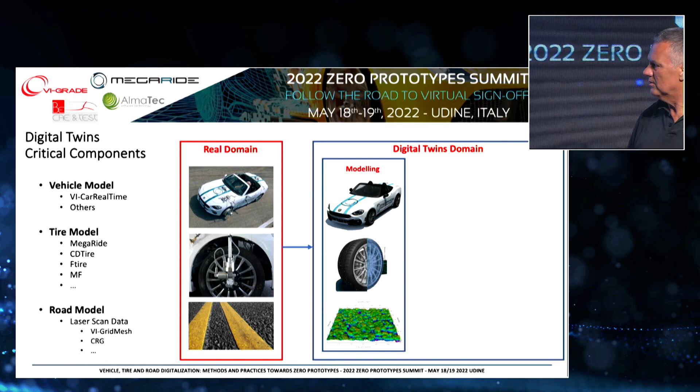And we started this joint work more than one year ago, putting together all the elements that make us confident that the digital twin, not so much of a specific vehicle but as a process, could hold, to continue the discussion and rely more and more on this duplication. So we are okay with the vehicle model, with the tire model.

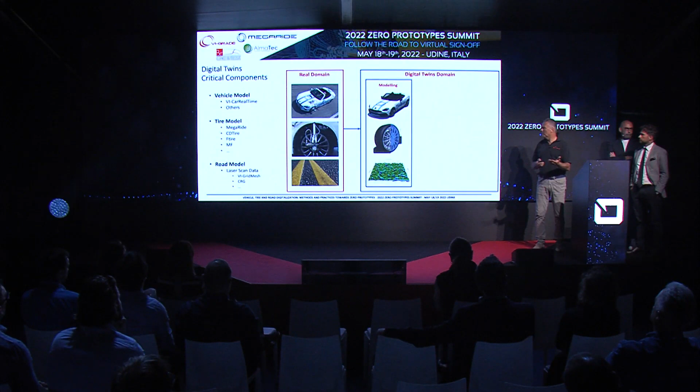The road model has always been something that for us was basically just inherited from geometrical measurement. But in reality, what we need to be sure of is that the road model, the tire model and the vehicle model are compatible with each other. So which type of work has to be done, for example, combining the road, the tire model and the vehicle model to have a reliable result.

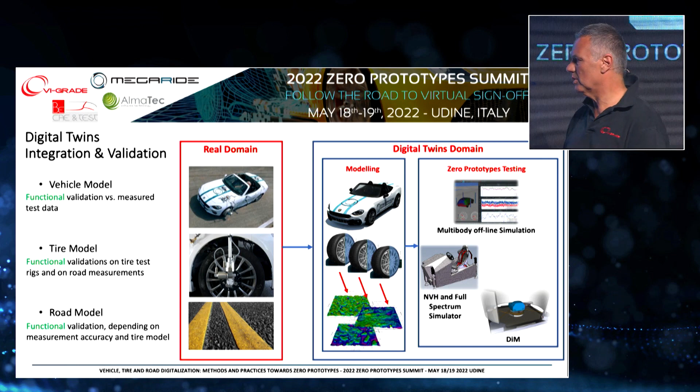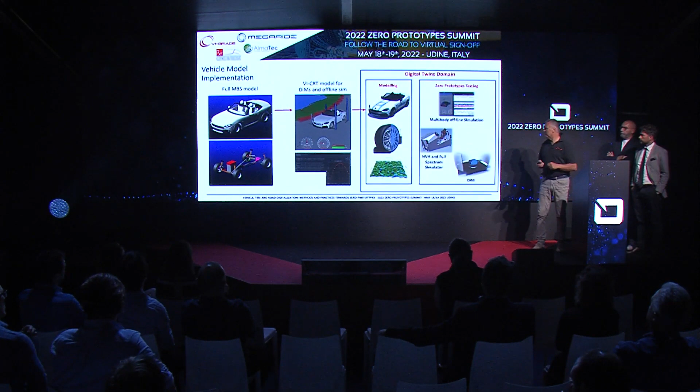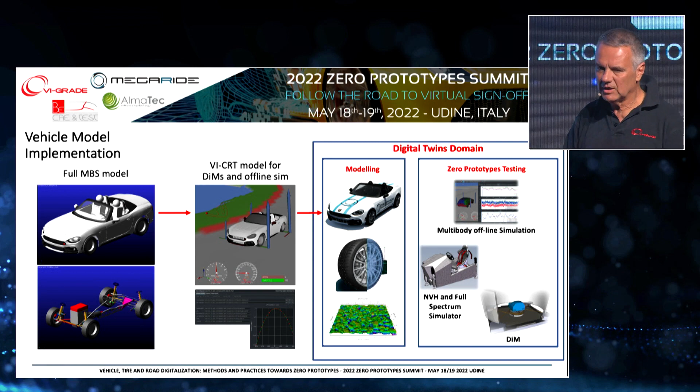You will see later. We want to have the full experience on the driving simulator. So we develop a really detailed model of the vehicle. Maybe we go to a simplified model or use the detailed model depending on the application. We use functional modeling, not only independent component-specific modeling; the integration of the modeling is certainly a very important part to consider.

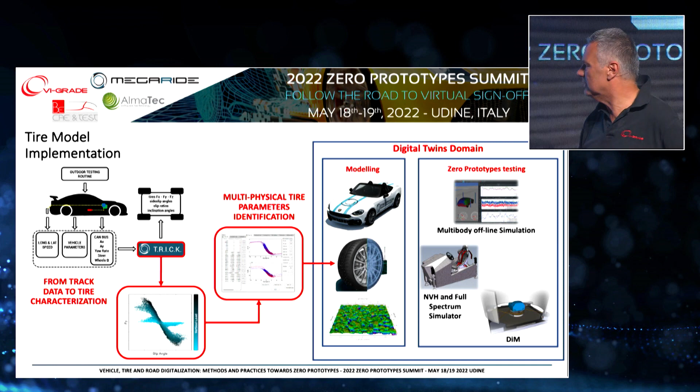And you will learn later what detailed activities need to be done to have this respond to requirements. And obviously, for the functional road model, there is some activity that has to be done, also measuring and knowing what is required to be captured to provide in the simulator the important feedback for the driver.

Then we can probably digitize everything, but the only thing we cannot completely digitize is the human driver. So after we do a really good job, how do we make sure that all this can be perceived by the real driver in the right way? Still, we have a real human on board the simulator.

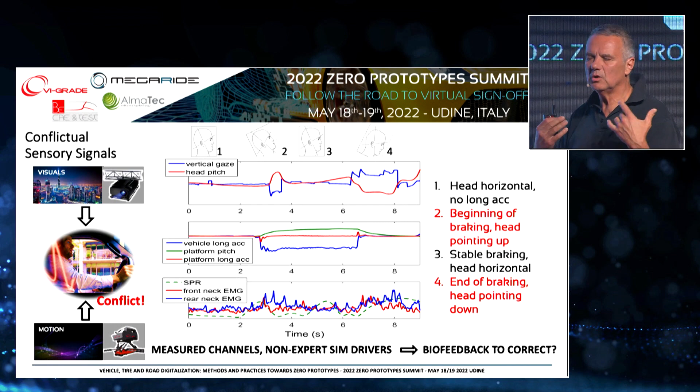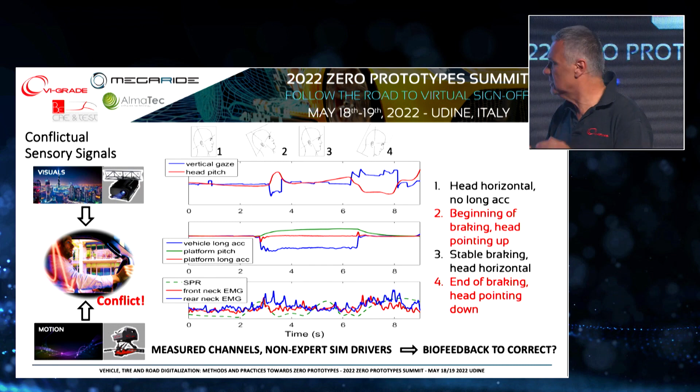At the same time as all the digitalization we do, all the continuous progress in the accuracy of the model, we also study the driver reaction. And in this simple case, we illustrate how, for example, there is a sensory conflict in a simulator when, during a braking action, the human expects to receive a certain acceleration, so he pulls the muscles of the neck back, resulting in the head, without any consciousness, being tilted upward, while the gaze goes down to keep the horizon fixed.

And this is probably creating too much of a rotation, unstable rotation of the head. This, of course, one has to realize, could be, especially in a beginner driver in the simulator, his limit.

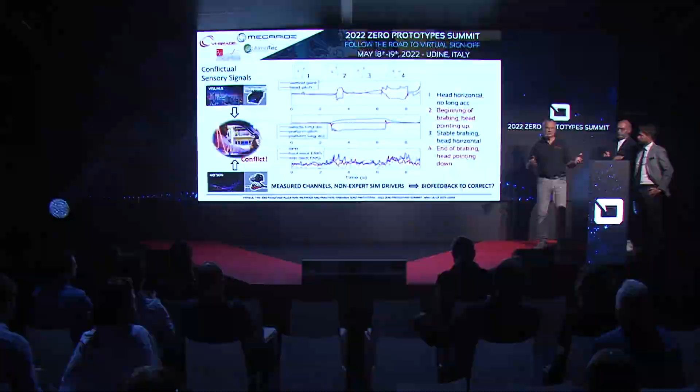And one idea that we want to apply and see if it could work is to apply biofeedback on the simulator, like skiers are taught by a coach when they see themselves again, for example, during an action. So it is possible to correct a little bit beyond what normally could be thought.

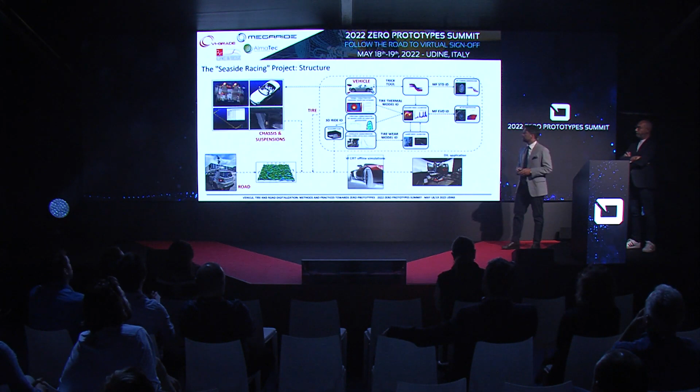So a potentially unknown track, potentially unknown vehicle, potentially unknown tires, trying to digitalize all of them with the process. So the main idea is starting from multi-physics of the tire, with a certain tire that we have on the ground of which we don't know anything at the beginning. Then the part regarding the activity we usually do on vehicles regarding the parameterization inside, for example, CarRealTime.

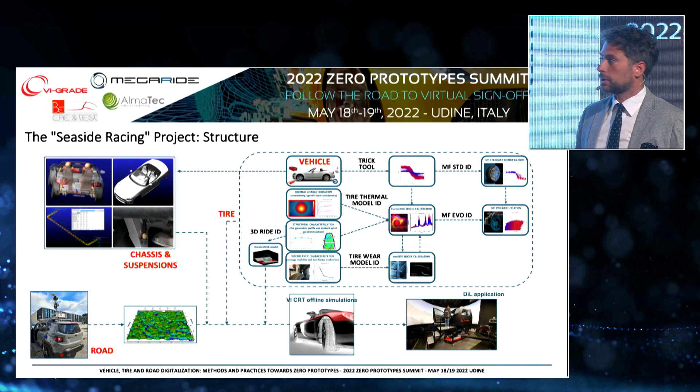Then there's the road, with the devices which allowed us to know something more about that road, virtualizing it and bringing it inside, first of all, the offline simulation channel, and after that the driver-in-the-loop application. So the targets of the project were optimizing the road texture geometrical resolution related to tire modeling and contact multiphysics.

Then we wanted to deepen knowledge on tire ride and wear effects on the driving perception. We want to correlate among road geometrical, frictional, and acoustic features of the road patches, and implement all of that inside the driving simulator for a multisensorial experience.

So the first step of our activity concerned the road and the external environment. With the proper instrumented vehicle, we had laser scan integrated photogrammetry, with 3 cameras and 2 lasers with a millimeter resolution. We scanned all the road of this track, which is Circuito del Sele.

And the main idea was to clean and filter the road point cloud in order to generate a grid mesh from zero. And after that, creating a correlation between the measured roughness and the algorithm of the parameters. That was the first step.

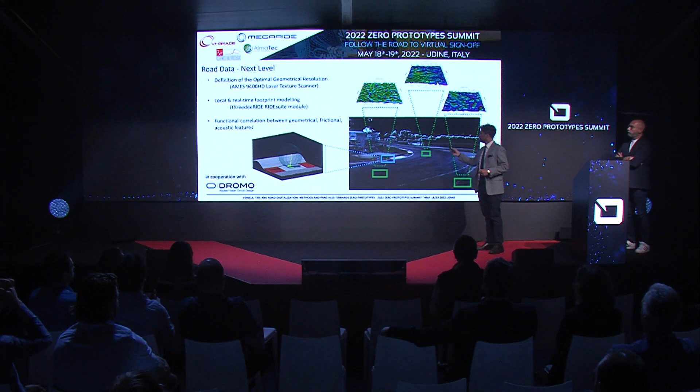The second step is assigning to each single point of the grid mesh some specific functional correlation. It means geometrical, frictional, and acoustic features to each different patch of the road, which has been scanned also with a very high definition rugosimeter, which is the AMES 9400 HD.

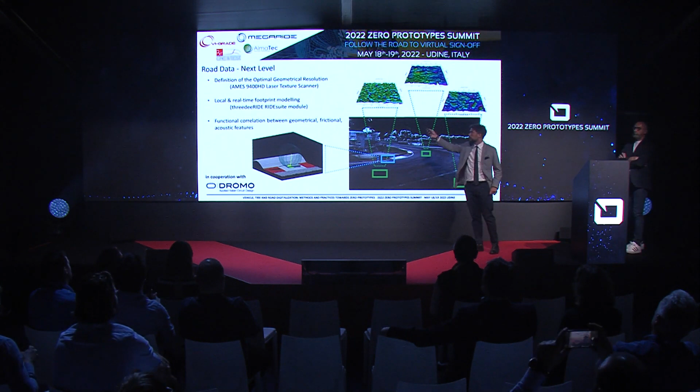Next step, we moved to tires. We selected the tire, it was a Toyo tire, and we moved with several different methodologies to get the tire data from several different procedures. The first one was with our TRICK tool, which takes the data from the vehicle and allows us to characterize the tires. We also worked with Calspan and with their bench, and we also mounted a wheel hub by Kistler on the wheel. So we had 3 different ways to understand how the tires behaved.

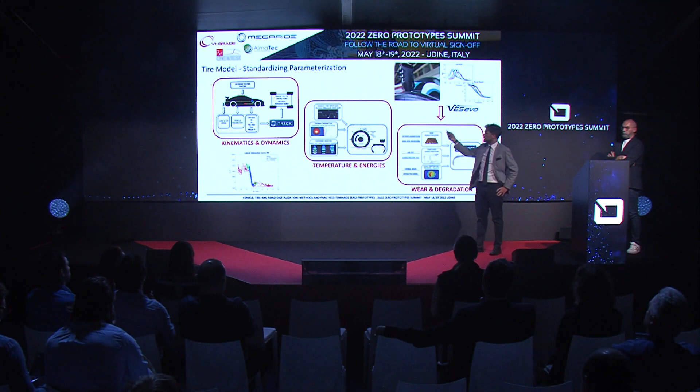After the kinematics and dynamics, we worked on temperature and energy, so we characterized the thermal conductivity, the specific heat, and the footprints with a completely non-destructive methodology of the tires we chose, and we put them inside our thermal model.

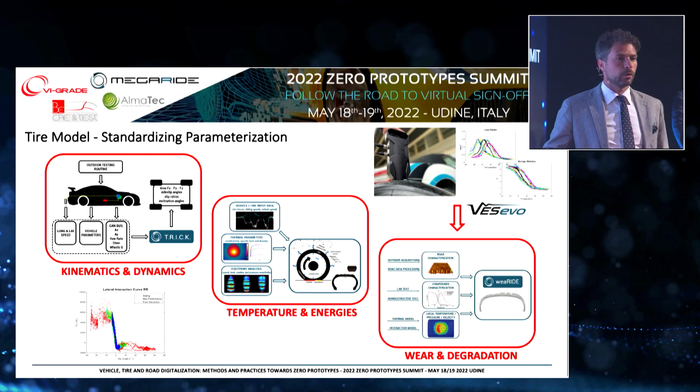And after that, once we have the energies and the temperature, we have also the roughness of the road, and we have the viscoelasticity of the tires by means of an innovative device called VESEVO that is in our booth in the next room. We had all the ingredients of the recipe that allows us to talk about wear and degradation. Wear is a very complex phenomenon which speaks many languages, coming from so many different phenomena.

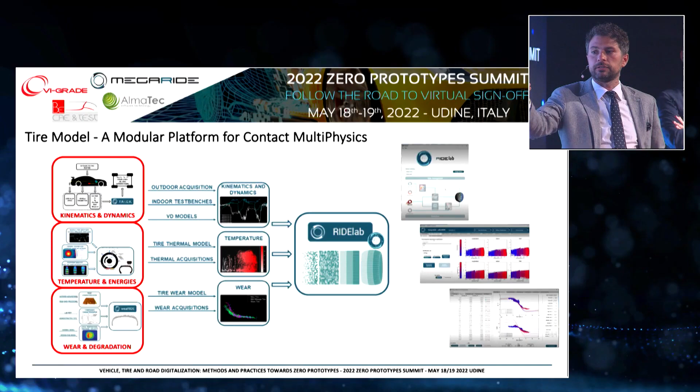So after that, we parameterized all our models, feeding a specific identification platform, which is called RIDElab, which takes into account all the multiphysical phenomena, so the kinematics and dynamics, the temperature and the energies, and the wear and degradation, putting the right parameters inside the physical models which constitute the RIDE suite tire model.

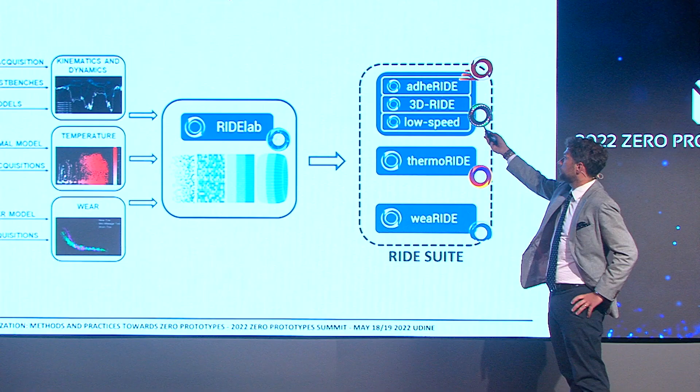We have an advanced Pacejka model which feels temperature, road roughness, and viscoelasticity. We have a 3D-RIDE multi-contact model that Gabriele will show us after. We have a low-speed module because, as you know, sometimes MF has some issues with low speeds. We have a thermal module and the wear and degradation module.

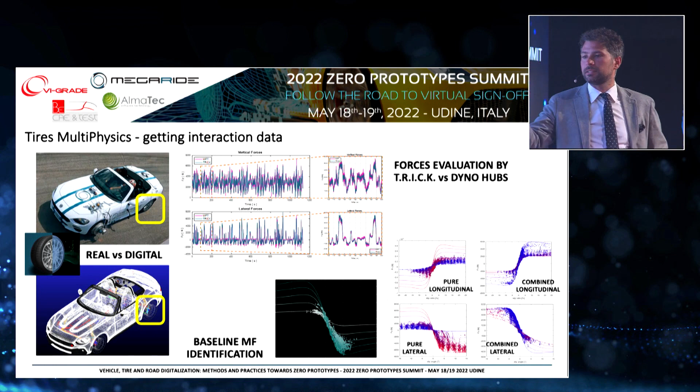What we did in terms of operative activity, we understood how we were estimating the forces with our methodologies. So here we can see that with the TRICK methodology, so from the vehicle data to the road, we are able to estimate the forces with very high accordance with the instrumented wheel hub that we had. After that, of course, we identified our baseline Magic Formula.

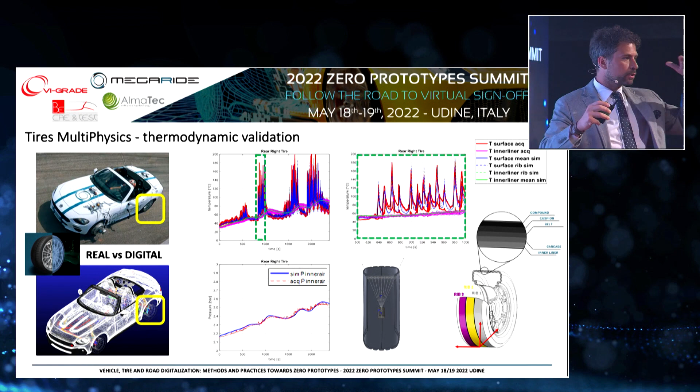Second step was identifying the thermal model. So we calibrated and we validated the thermal model, taking into account the measurements that came from the external tread and the inner liner sensors. And once we have properly identified and calibrated the model, we have all the information about the temperature layers which are inside the tread block.

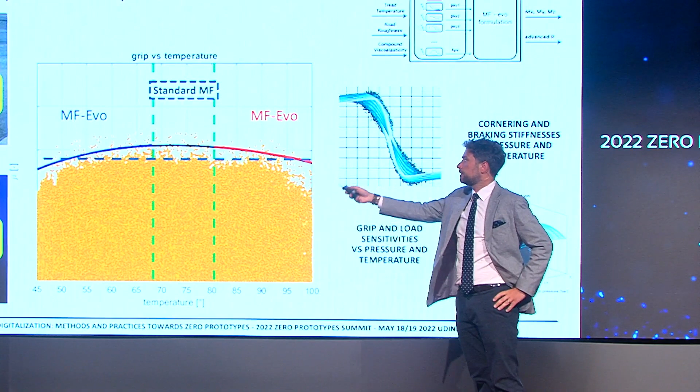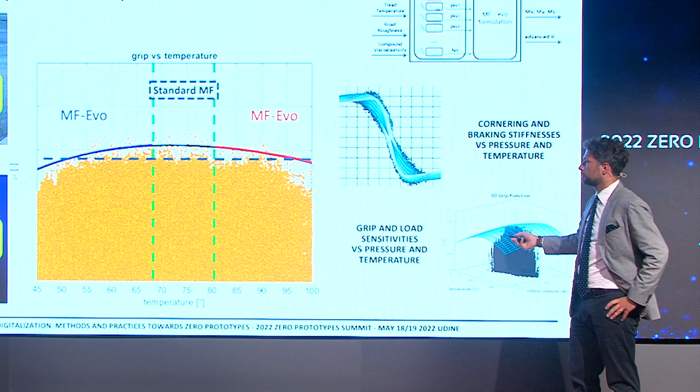Having this kind of information, it's possible to understand how the friction level is changing with respect to the temperature, to identify this kind of trend, putting them inside the advanced Pacejka formulation, taking also into account the variation in terms of cornering stiffness, braking stiffness, and of course, inflation pressure sensitivity. All these things go inside our advanced formulation, which is called MF-Evo, which allows us to put all these things inside the simulations. We also validated these things thanks to some Kistler data.

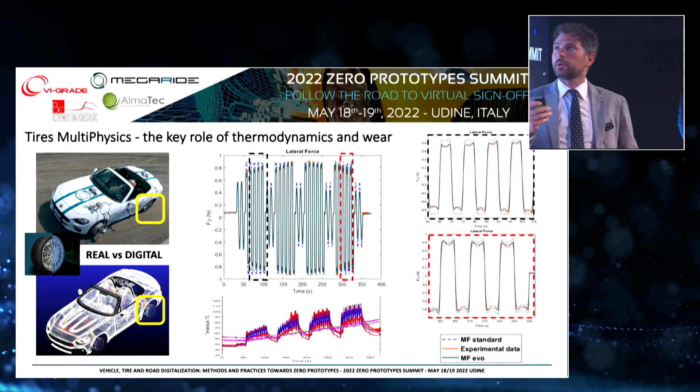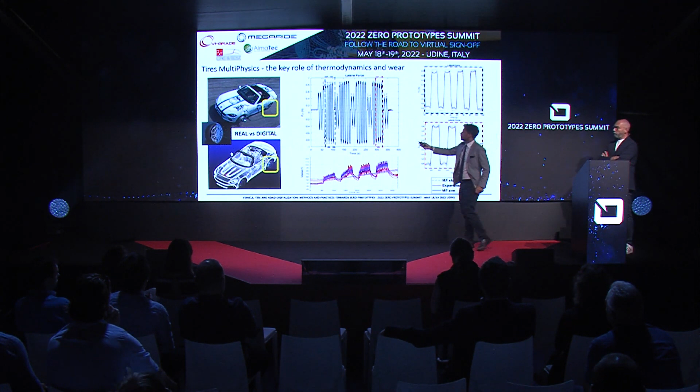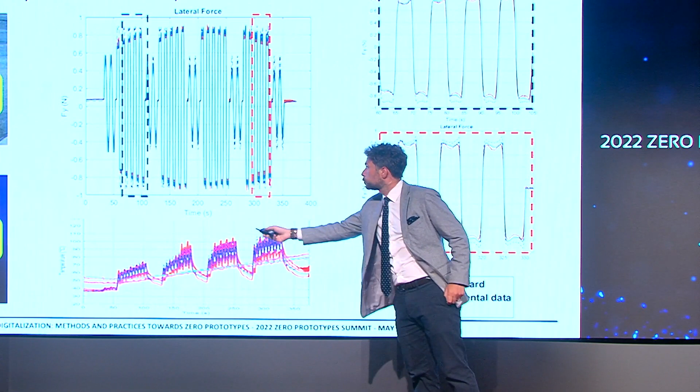And what we can observe inside a typical test is that if we identify a Pacejka at the optimal friction level of the tire, we will be able to fit only the results of the Pacejka when it reaches its maximum. But when the thermal level at which the tire is working is too high or too low, inside the red and black squares, we see that the normal Pacejka is no longer able to fit the friction level and the force level, which can be fitted only taking into account the thermal effects inside the Pacejka model.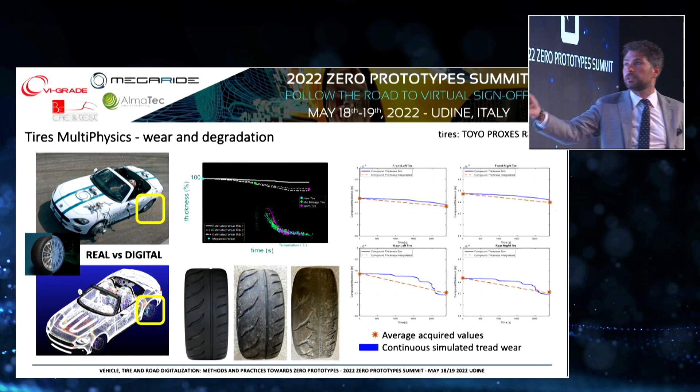Finally, once we had all these things, we put them inside our physical wear model. So we were able also to validate the wear on track because we had the acquisition at the beginning and at the end of each run. And so in this way, we have the acquisition in terms of energies, temperature, road roughness, and viscoelasticity variations of the compound of the tire, and we're able to know time by time the evolution of the tread thickness level of each tire taking part in this activity.

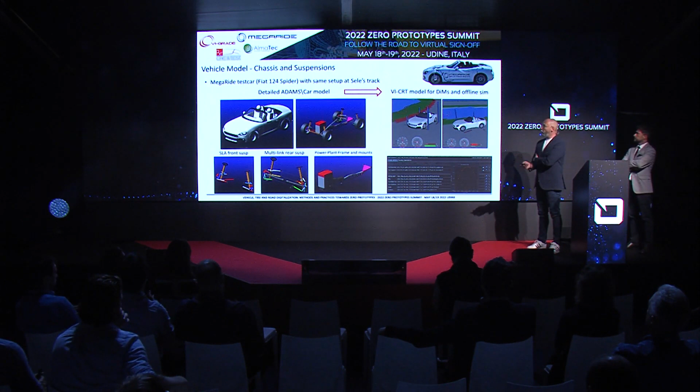Of course, the last step, but not last in the order of things that have been done, is the creation of an appropriate vehicle model. This is a standard procedure, starting from a detailed multi-body model with many degrees of freedom, even including the powertrain mount system, into a car real-time model that can work in our driving simulator.

Of course, there are initial steps, that is an offline validation using the offline tools. And we had the possibility to make a correlation and validation based not only on standard signals like yaw rate and lateral acceleration, but also on forces, lateral, vertical, longitudinal forces obtained from the dyno hubs that were installed.

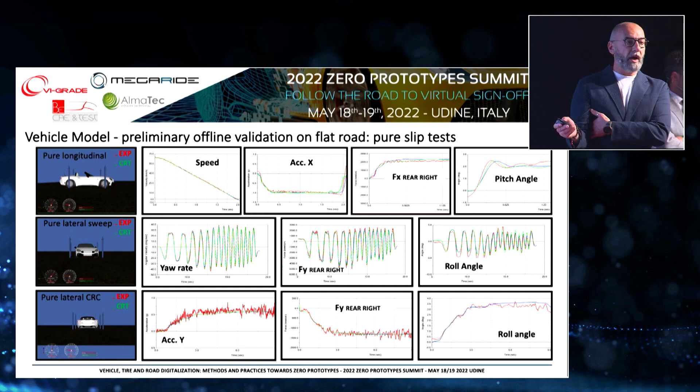Then we moved offline to a max performance simulation environment, trying to catch the differences coming from different levels of road discretization and road roughness. And of course, having also the possibility to compare the calculated loads and the measured loads along the whole track.

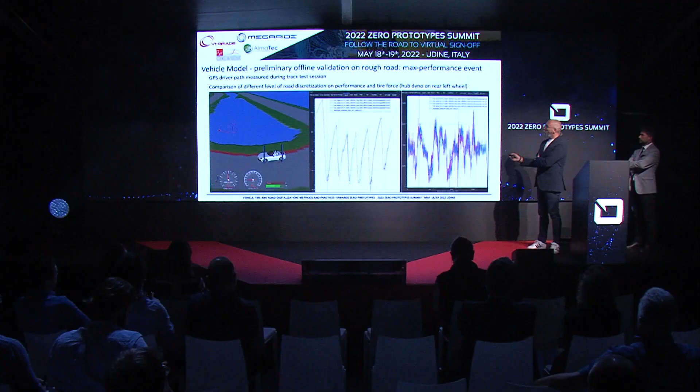After this phase of correlation and validation offline, we needed to understand the feeling of the driver, Claudio Anicello, the driver who is currently running in the demo section at DIM 400, and to receive his impressions comparing the real driving with the driving at the simulator, but not only in a single scenario, but with different simulators, 150, 400, and even the compact, moving from standard operation, which are considered like a sort of chassis tuning

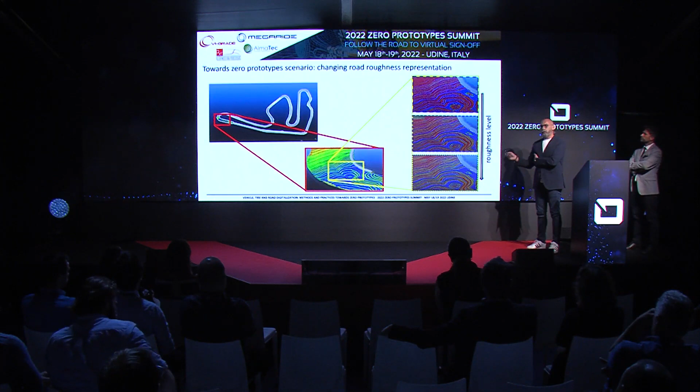towards, we said, zero prototyping, but also to understand the feeling when you change the road surface, when the temperature of the tire changes, so the heating of the tire and even the wear effects on it based on the model delivered. And not only this part, but also trying to understand what are the best solutions in terms of road roughness. Here is a representation at the end of the main straight line of the Sele track, when AlmaTec tried different kinds of ways to obtain an efficient point cloud representation, a grid mesh representation of the road.

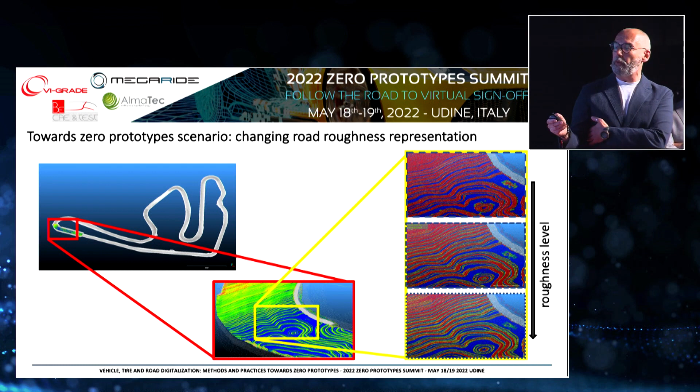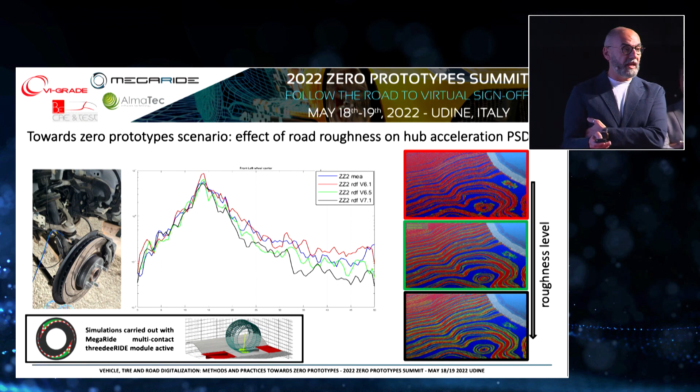And we had an additional possibility: during the old tests, we fitted the car with more than 20 accelerometer channels to measure hub accelerations, seat rail accelerations, and many other points which were of interest. So in this case, for example, we have a power spectral density calculated using car real-time output compared with the experiment; the blue one is the measured power spectral density. We had the possibility to compare this PSD against different calculations obtained from car real time with different conditions of roughness levels using the threedeeRIDE module of MegaRide.

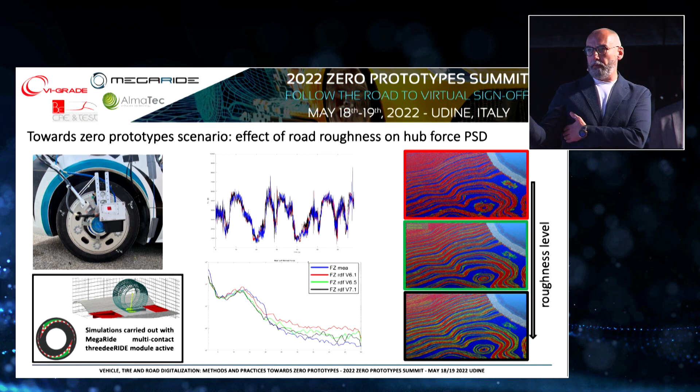And finally, we had also the opportunity not only to check accelerations, but also to make some comparison in terms of power spectral density of forces. Here is, for example, the vertical direction, to be aligned to the previous slide, but it's a different point. The previous one was on the front, this one is on the rear, just to represent the different measurements that we have done and compared with numeric results.

And in all this scenario, which tends to zero prototypes, of course, we had the possibility to have the feedback from the driver and to understand how the driver was able to catch, for example, the change in the tire temperature during different laps at the simulator, to feel the change of the car while changing the wear of the tire, or how the road perception affects his feeling of the car, and how all these parameters can have an effect on the global chassis tuning of the car, because there is not a single optimum in terms of chassis, but we need to consider different conditions.